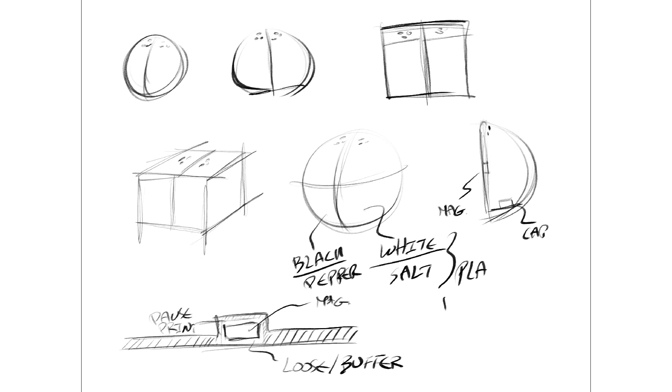All right, let's start CAD modeling now. The concept I decided to proceed with was the spherical concept from the sketching. So I'm going to start with that - a simple revolve, hand-sized.

I'm going to use my own hands for the anthropometrics in order to know what would be the average size human hand. With that, I'll get a ballpark of how big the spherical-shaped salt and pepper shaker should be. I'm going to use in SolidWorks the single part multi-body option - this is the way I'm going to model this part. Let's start.

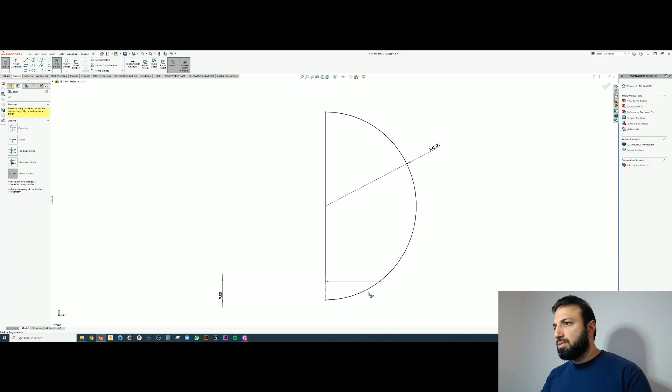Okay, so now we have a spherical revolved shape, which I think looks very nice, and it will end up having a good aesthetic feeling overall in the model, or in the product itself.

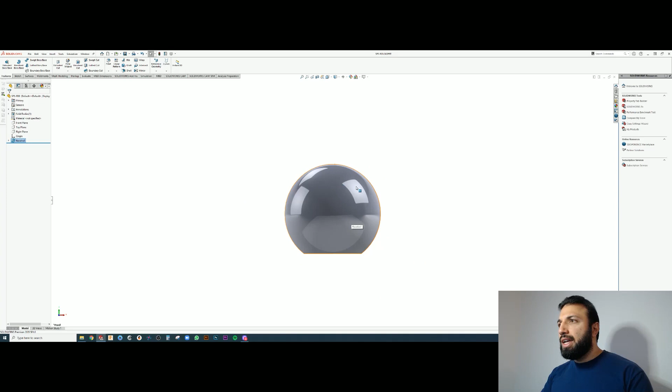The way I've done it: I checked my hand, it was roughly 78 millimeters, so I rounded this up to 80 millimeters, and I cut from the bottom 8 millimeters. Then I realized, okay, that would be minus roughly 10% of the overall height, so I just made it more - 90 millimeters, with a cut at the bottom or at the base to act as the stand for the entire salt and pepper shakers.

So with that, I would continue with the modeling of the individual components. I'm going to do a split line, splitting the sphere in half, signifying or modeling the salt and the pepper as separate objects. Let's do that.

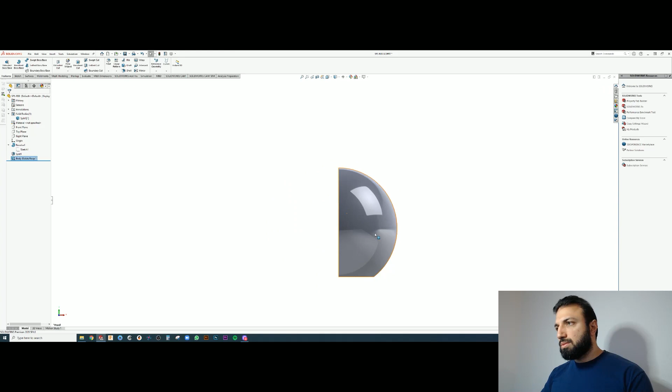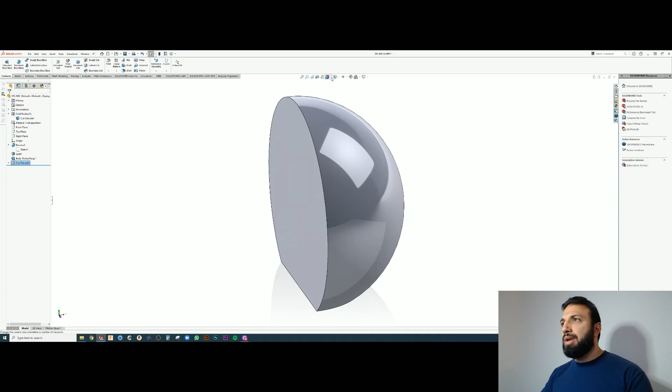Okay, so now I split the body into the two half-sphere pieces we needed. This made me think about where to place the magnet. Where would be the ideal place to place the magnet? Probably a part like this would be better off printed on the side, so that surface would be facing the bed.

In this case, I would place the magnet, or the entrapped magnet, on top of this layer. The two pieces, or the two shaker pieces, will be attracted to each other by the magnet, so they're going to have a nice snap when they get near each other - like they're sucked together very quickly.

I have my magnets here - these are 10 millimeter diameter, 3 millimeter thickness. These are the ones I'm going to use. They're pretty powerful, pretty strong, with a strong magnetic field. I think they're very decent for this application - they'll have a good, snug, tight fit, but they won't be too powerful for the forces of a simple application like taking them apart to put salt or pepper on your food.

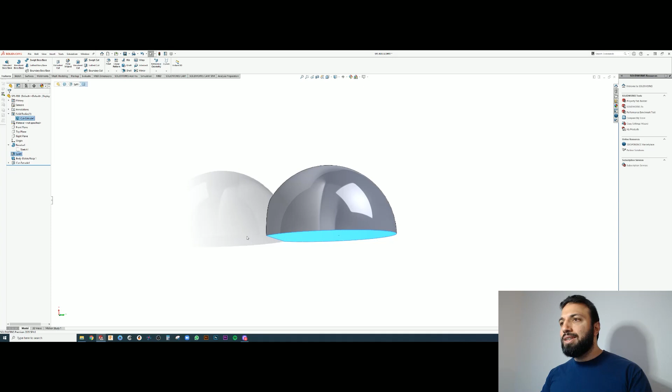So this is the surface I'm going to model the magnet onto. You might have noticed I've made some sort of a base here - I thought about this as well. I think it would be beneficial to have a cap here in order to refill your salt or pepper. The idea is that I needed the cap to be offset a bit from the ground, so the cap won't be unleveling the entire base. That's why I did that, and we'll follow the cap design in a second.

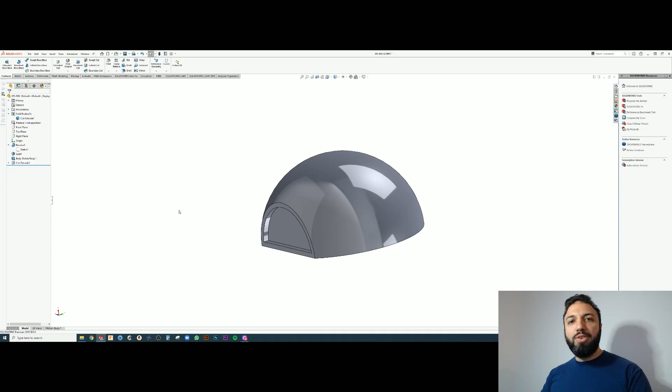But first, let's model the magnetic piece.

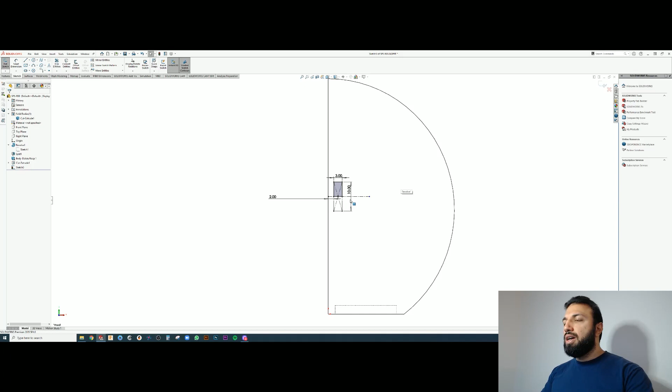Okay, so here this is an interesting and an important point that I need to mention. So right now the magnet, as we said, is 3 millimeter by 10 millimeter, and we're gonna apply a revolve roughly in the mid, or actually exactly in the middle of that line span. The question here, or a critical parameter to consider in this CAD model, would be the distance between the magnet and the wall.

At the beginning, I was thinking about having it roughly 2 millimeter, and I was like, maybe that would be too thick, because consider here you have 2 millimeters of plastic, and on the other side you have another 2 millimeters of plastic. So that would be 4 millimeters of plastic as an obstacle towards the magnet itself. So let's make this a little bit less. If we're printing with a standard quality, again, this is the direction of printing. So this is the start and this is the end, or this is the direction left to right.

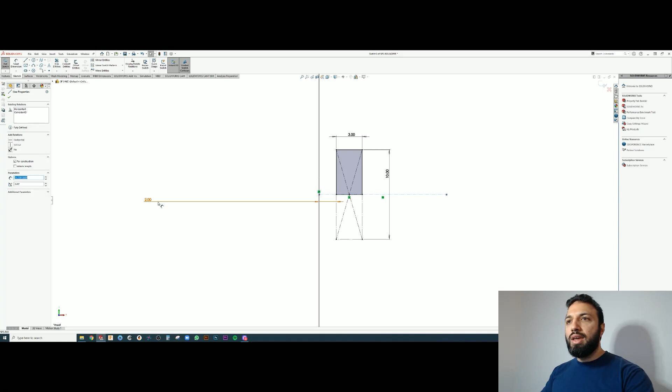If you're gonna follow the 0.2 millimeter height of print, 2 millimeter will give you, I would say, 10 layers. So let's go with less than 10 layers. So maybe 0.8 millimeters would be roughly 4 layers. If I would add some buffers as well, because we need to have some buffers along the actual magnet, which is exactly what I will cover in a second, I would make it maybe at 1.

And you will see in a second that when we build the plastic around it, it will be a little bit loose in the pocket that we're gonna create right now. But for now, this is where I'm gonna model the magnet, 1 millimeter from the wall. Let's continue.

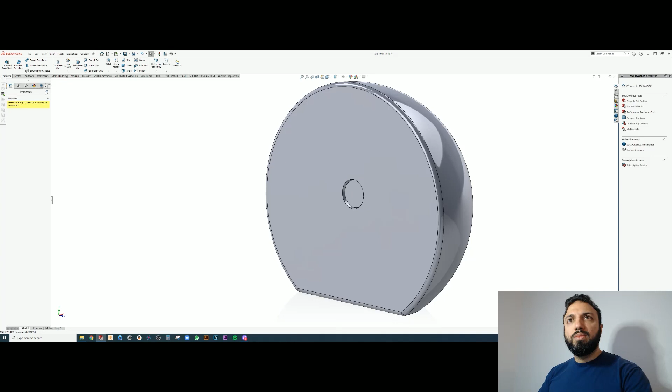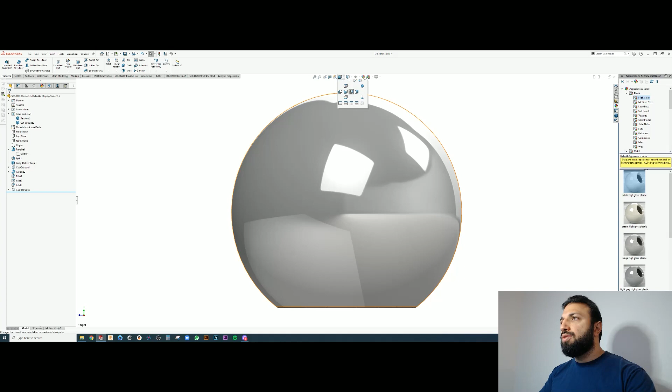Okay, let's talk a little bit about what we have done so far. So basically, I was thinking ahead about how to trap the magnet in the model. And the best way to do this in this particular model would be, after we created the solid of the sphere itself, or half the sphere, to create a shell feature.

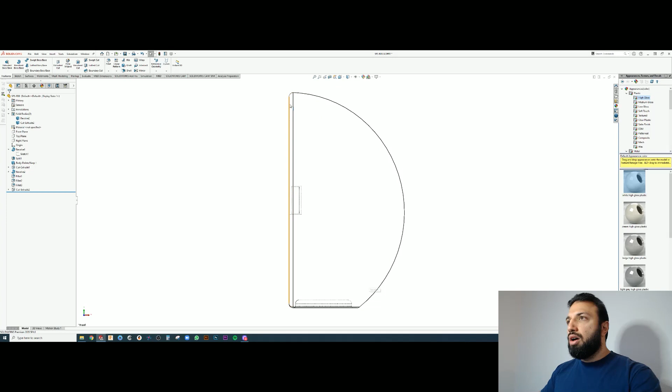This shell feature will basically create a contour of the same geometry in 3D, offset inside or outside if you wish, but in our case we're going to do it inside of the same solid model, hence creating the negative space inside where it will take the salt or the pepper. So I was thinking, now is the best time to create the pocket for the magnet. After this I'm going to do the shelling, so the shell will follow the contour here, and afterwards I'm going to close this one with an additional small extrude.

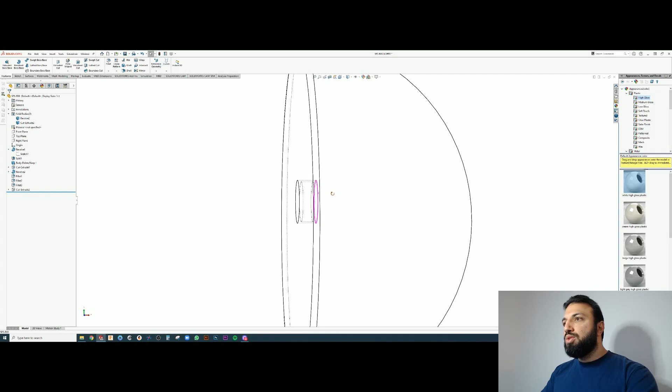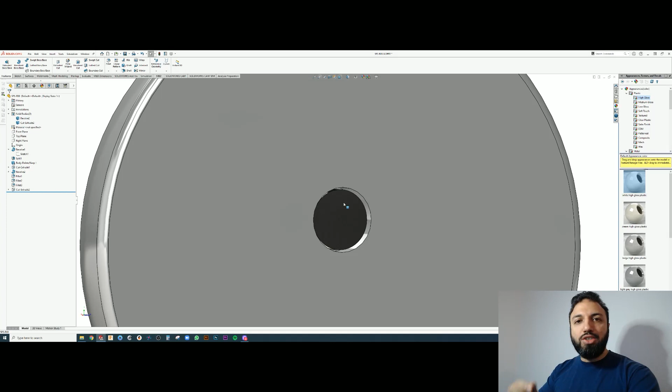So whilst doing that, you saw I modeled a cut. The cut here, as I mentioned earlier, is a trap magnet solution. This is not a tolerance fit or interference fit design where we're gonna squeeze in the magnet, because there is a difference. With this trap design, I will be printing, as we said, from the bed until the ceiling of the magnet. Then the print will pause, giving me the chance to insert it. Then after that, it will continue printing.

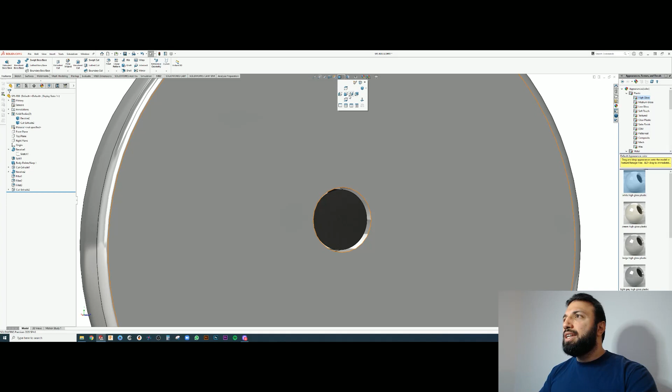In order to do that, I need to make sure that my nozzle is not hitting the surface of the magnet, or even worse, that the magnet is not latching itself to the body of the extruder, due to the magnetic forces. So what I've done here is I created very much of a clearance fit, a very easy to insert clearance. I think I used 0.3 at this stage, or even more. Let me remind myself very quickly.

And actually it's 0.4. So 0.4 in general is very good, because your nozzle diameter is actually 0.4. So basically, you're telling the extruder to move by a nozzle span outwards. And on the diameter, this will be 2 nozzle spans, which is very much from experience as well. So this is very good clearance. The second thing is where this cut will stop.

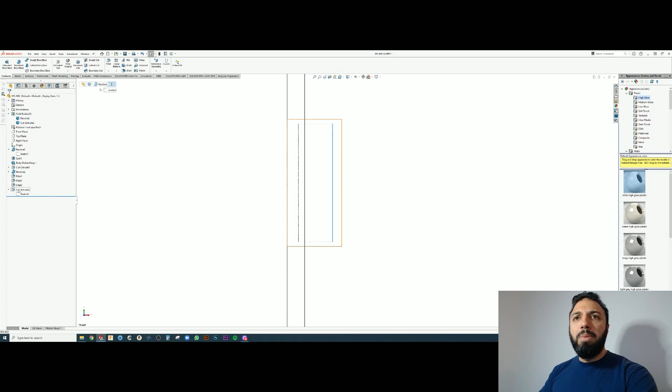I'm a big fan of making things related to each other. So if I later on wanted to change something in the model, I do not need to enter numbers and everything. So I made it an offset from that surface, i.e. the surface of the magnet, by I think 1 millimeter. Yeah, actually 0.8. So let's talk about that for a second.

0.2 millimeters is the layer height usually, right? 0.8 millimeters in a 0.2 layer height will give you 4 layers. If you're printing at 0.3, a 0.8 will give you actually less. In this case, it will give you 2 or 3 layers, depending on how the slicer will slice things eventually.

So in order to be on the safe side, again, I put 0.8. So it will be 4 layers in the case of a 0.2, and it will be 3 layers in the case of a 0.3 millimeter detail level. Again, as you remember, the arrow direction is the printing direction.

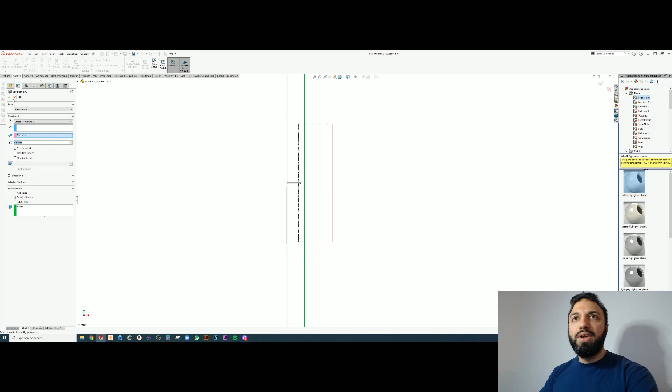Sorry, it's not very easy to explain. So if this is not very clear yet, let me know, and we could definitely do it. So now we did this, and now we're gonna continue.

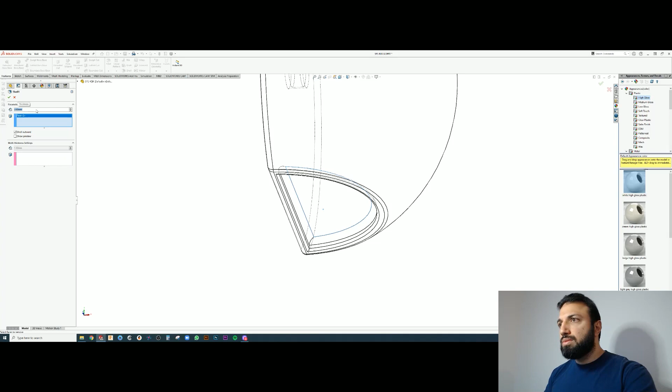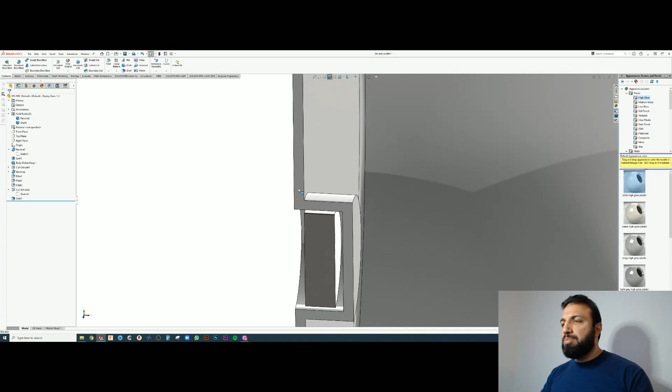Okay, so now we did the shelling. So let's again talk a little bit here for a second. I used a 1 millimeter thickness, and I'm gonna basically be printing only the contour. I do not need to print any infill because I want to maximize as well the space of the salt and pepper inside.

One of the things I noticed when I was doing this in SolidWorks is it didn't give me except a very limited, like very small thickness if I didn't compromise a surface. So I basically gave up that surface because it's the easiest to remodel, and I'm gonna do that right now. And whilst I'm doing so, I will add the cap hole where we're gonna be filling the salt and pepper from.

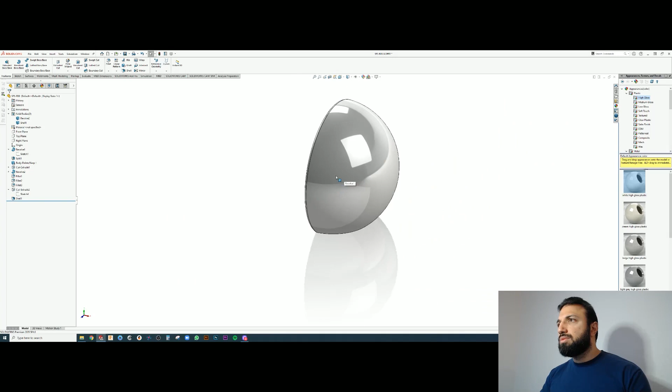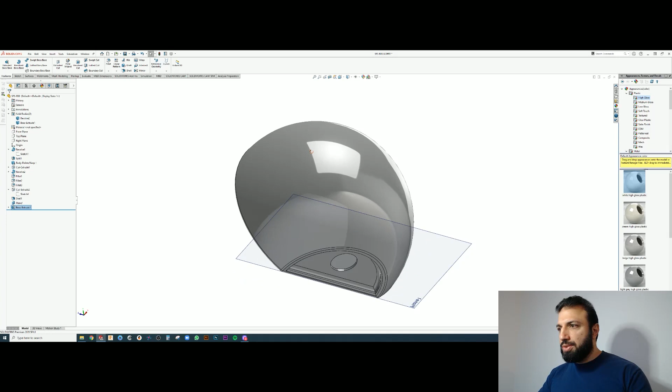All right, so now I think it's clear what we've done. So we replaced the face that we have removed. And with that, I added as well the hole for filling. So I made it a little bit larger, I think to 12.5 millimeter. 10 millimeters seemed a little bit too small.

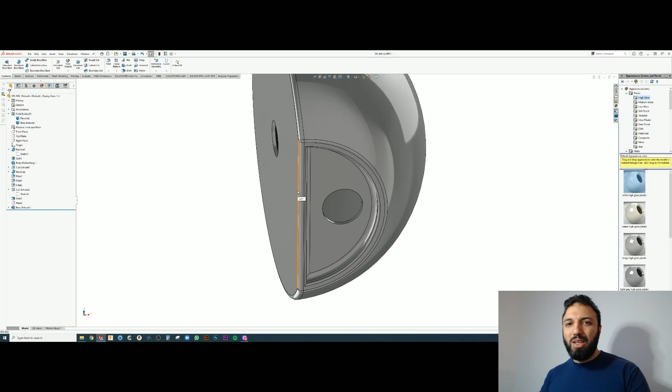And again, from a user-centric design, I think the larger that hole is, the better, because filling might get tricky, and you do not want to have a very small hole diameter here. So that was basically it here. So let's conclude the trapping of that magnet now.

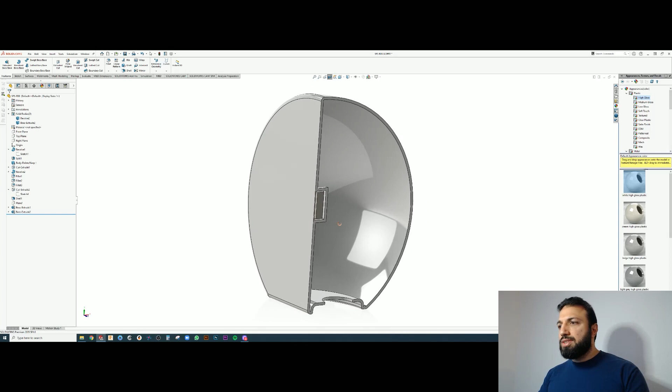Okay, so now our magnet is trapped inside. I think we have achieved what we wanted to achieve. A couple of points here, as you can see, the edge here, I made it again at 0.6 millimeter. Same concept applies. If you are having a 0.2 detail level, that will give you 3 layers. And if you have a 0.3 detail level, that will give you 2 layers. I think that is good enough to establish the base of the print.

And as well here afterwards, all of this is air, right? So all of this is loose. Your magnet will be pretty much loose in this case. We might be able to tighten it a little bit from this side. And when you insert it, it will be basically falling down. So this space will end up being much bigger than this space. Right? I could even hear that the magnet will be kind of shaking inside.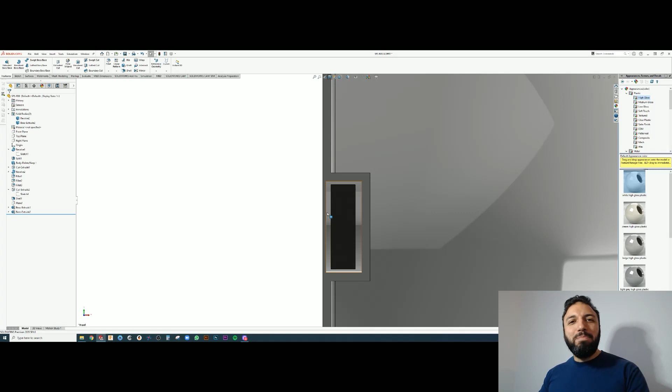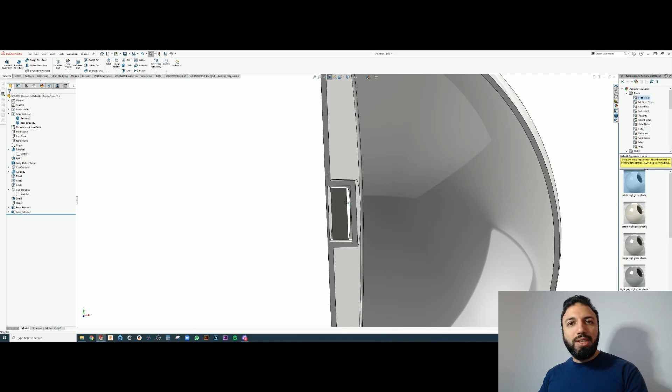I think that might be a nice thing to hear. But maybe we could make it a little bit smaller in the second iteration. Let's see. I do not want to be presumptuous and assume it was going to work perfectly. But from what it looks like, there is no reason to believe that it's not going to work. Maybe now we add some holes for the salt and pepper to flow from on the top surface. Let's do that.

Okay, so let's spend some time talking about why we're modeling this hole to be particularly large. You could see here the 2.5 millimeter diameter; your nozzle is probably 0.4, because that's the most common nozzle in the 3D printing industry, specifically the FDM desktop or home kits like Prusa, Anycubic, and all of these commercial home desktop 3D printers.

You're going to end up having a 0.4 nozzle; this is the stock nozzle, as they call it. If you go with a 1 millimeter, this is a little bit uncommon. If you go less, which is 0.2 and 0.3, and maybe there is a 0.1 as well, I think it's called the mosquito nozzle. So all of these nozzles are there.

I'm aware of this, but when I'm designing, I'm aware of what the nozzle diameter is. The one I have on my printer is a 0.4 as well. I'm not planning to change it for this particular print. So imagine, if you put a 2.5, this is what you're going to end up with. This orange or now blue circle is what you're going to see because of the nozzle diameter, right?

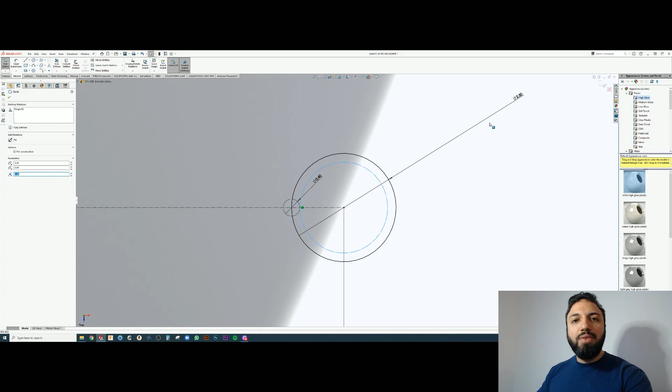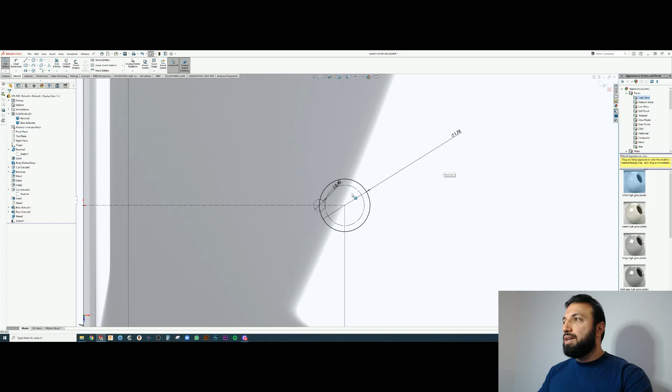Give yourself some buffer. So I think 2.5 might be too much because, again, we do not want the salt to be flowing very easily. So maybe a 1.5, yeah, maybe that gives me the impression it's too small as well. So I was gonna go with the 1.75. And again, design is all about iterations, and this is our first iteration, and maybe we decide to make it bigger in the next print. So let's proceed with that.

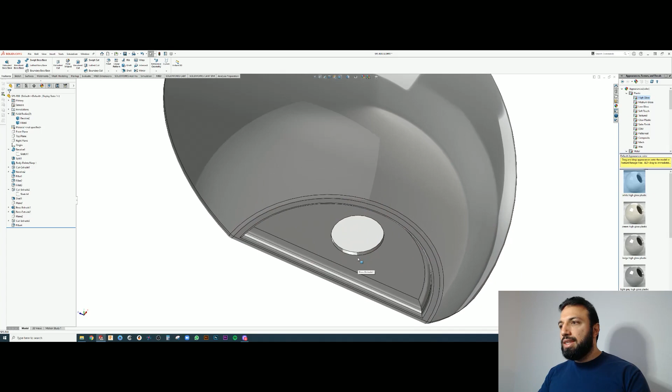Okay, so now we finished the modeling of the holes of the salt or pepper shaker. I think I'm gonna keep them both to 3 holes just for being symmetric. I like this idea. What I'm gonna do now is model the cap, right? So the cap will be added to the bottom as you probably see here, and with this I will go ahead and design it. Let's do that.

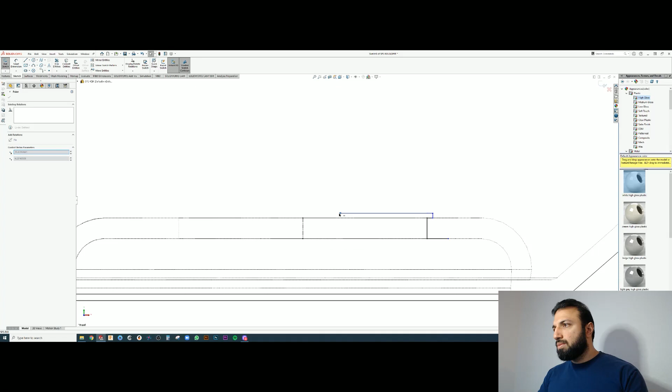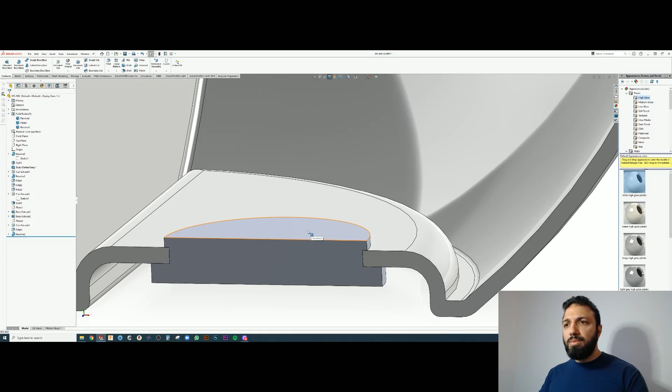Okay, so now I think we've modeled the cap for the salt or pepper shaker. As you noticed during modeling, there are quite a few parameters I used here. So first of all, I created a shoulder so when you insert the cap, it is going to latch a little bit here. As you can see, everything is basically aligned, which is very uncommon, and you're not going to see me do this a lot. But this is because I need this to be a very tight fit. So this is the reason.

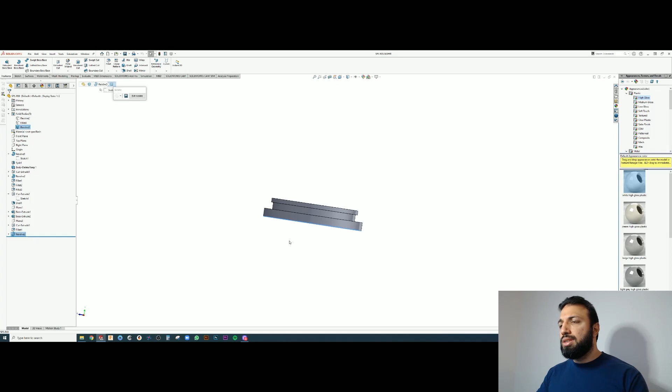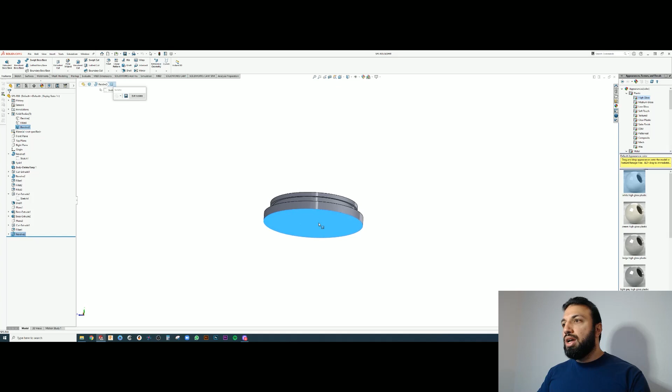So this means I might not be able to create a very deep place to place the fingers, right? Usually in these types of caps, you have a space where the fingers go, and then you pull it out. As a substitution, I might need to do a notch from the sides to enable the user to grab it. Otherwise, that would be a bad design. So I'm gonna do these side notches to enable pulling it out easier.

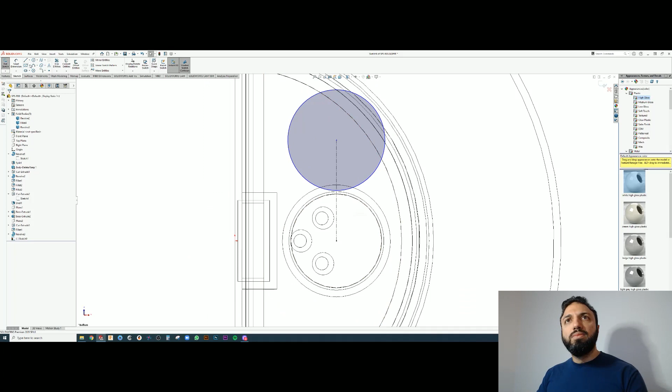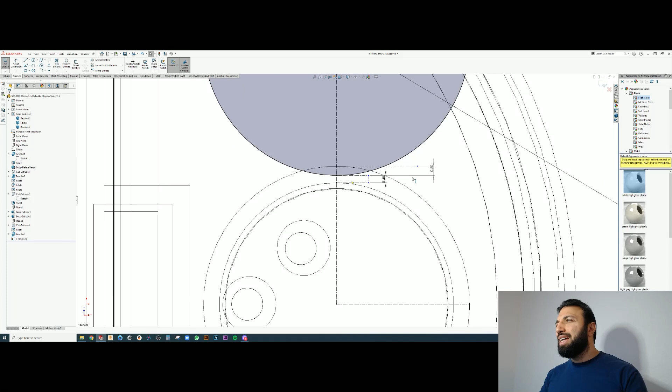Okay, so another point here: we're trying to create the side notches, but the shoulder is not big enough, right? If I used two cutouts of 15 millimeter circles, I will end up with only half a millimeter on each side for that notch. I think that's not big enough for a human to grip. So I'm gonna increase the shoulder of the cap base a little bit to get at least 2 millimeters here. Okay. So with this, I think we reached exactly the point we wanted, which is 2 millimeters. I think this is cool. And let's proceed.

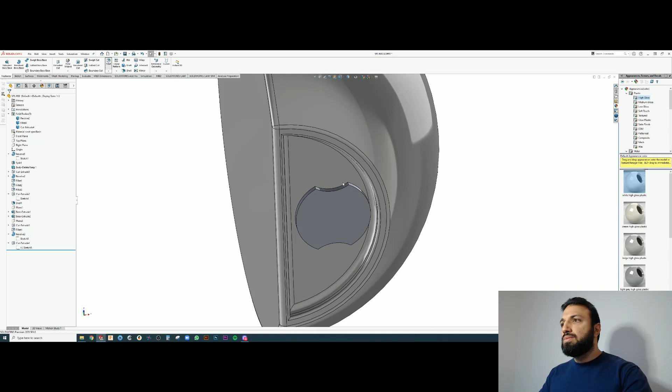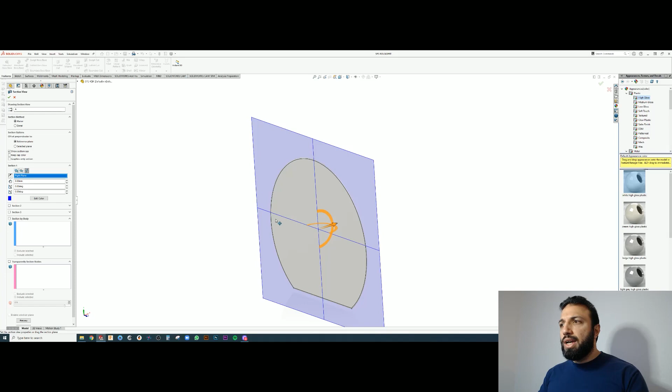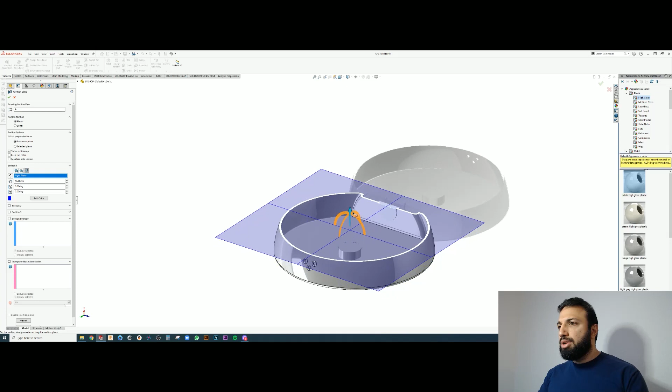Let's do a quick pre-flight check by sectioning everything and checking it through as if it's a normal print. Usually what I do is place it like this, as if this is the printing, and I go through it step by step. It looks very cool actually too. Of course, I'm not gonna print the cap in this position, but it gives you an idea of how things are gonna be printing, until we go all the way up. Okay. So that direction looks good to me.

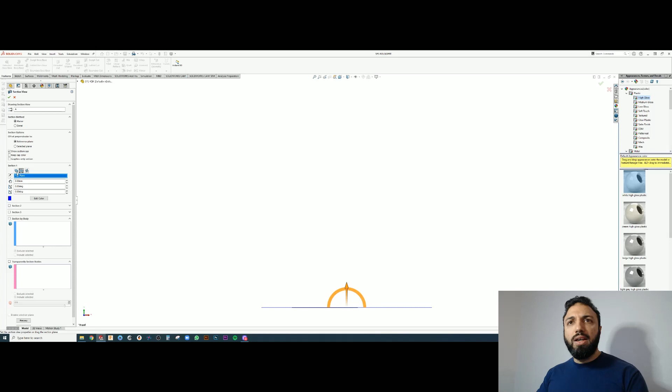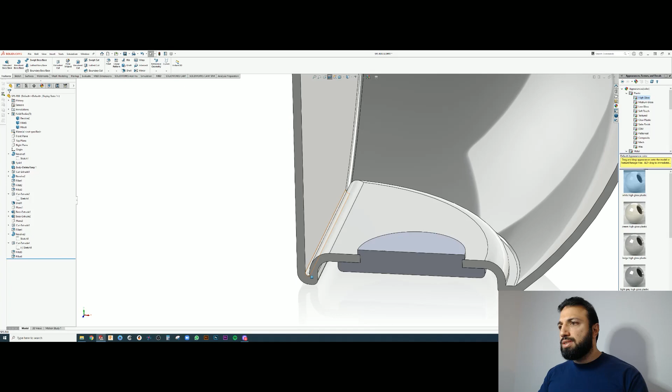The second direction, which is the magnet direction, I think this looks fine. I think I will fillet these edges a little bit. I do not want these sharp corners where the salt or pepper is gonna be trapped or accumulating after some time, right? So you want to make it a little bit more curved. I think this looks nice. This looks okay now. I think this will prevent any sticking. This might be another concern here around these edges where again salt or pepper might accumulate over time. So maybe we need to fix that as well.

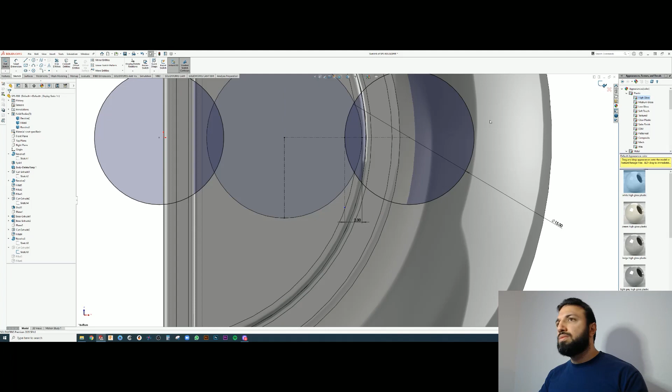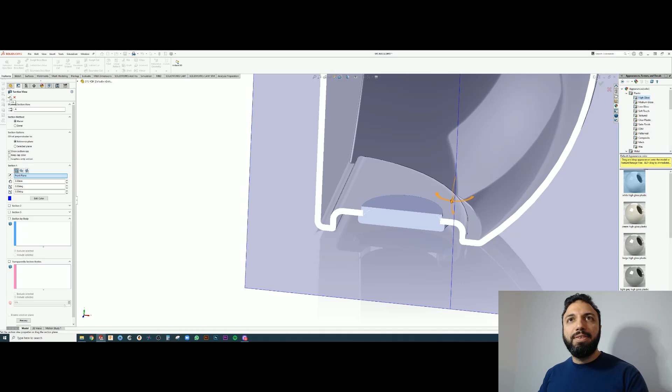Okay, I think now it's clear. We've solved this dilemma. I think this is better than before. Yeah, by doing so, of course, as always in CAD modeling, you create some ripple effect in some area. So I just had to readjust or reorient the cap. I think that's cool as it is right now. Again, this is iteration one. Maybe we need to do another iteration or so. But let's do that, and now we're going to mirror the objects.

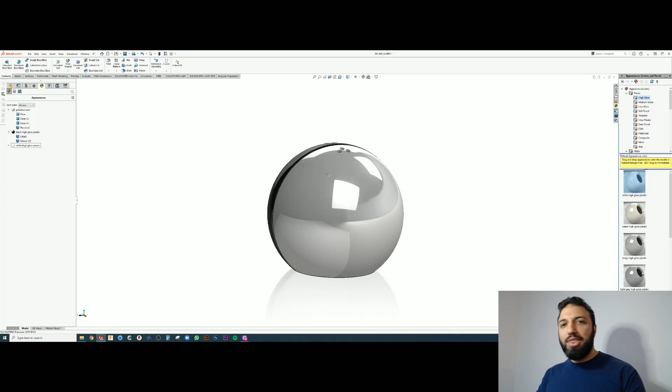Okay, so this is now our object. I think it looks very cool. I like the contour. I like the spherical shape. I think it's very nice. Actually, I have a disclaimer. This is actually a reinvention in the 3D printed form of an existing product I had before. But I like the spherical shape. I think it looks cool aesthetically. It's very pleasing to look at. And now we're about to take it to 3D printing, so let's start slicing.

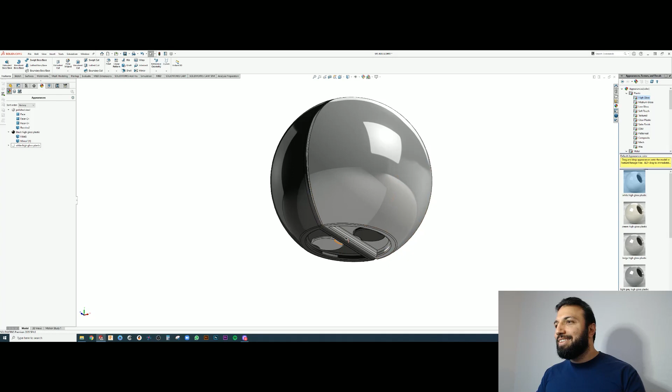As you can see here, I did some cool trick on the bottom, where I made the black cap on the white shaker, and the white cap on the black shaker. The idea here is basically to make it a little bit more visible, and it acts as a signifier or an indicator that this is where the cap is, and where you could pull it out and so on. So what I'm gonna do now, I'm gonna hide the unnecessary objects.

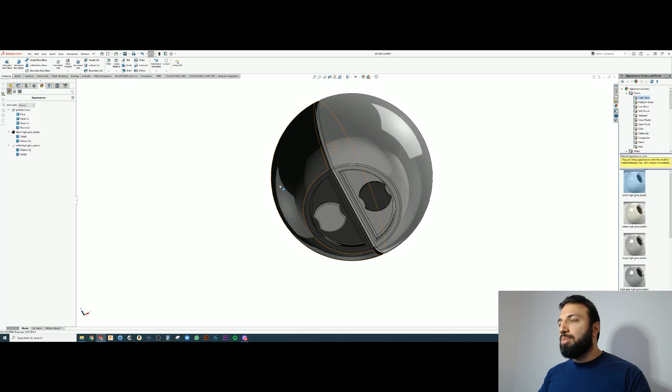The cool thing about this print as well, it's identical, it's symmetrical, so you just need to change the filament but use the same G-code that you export once. You do it twice, once in black and once in white, and after that you swap the caps. So let's do that right now.

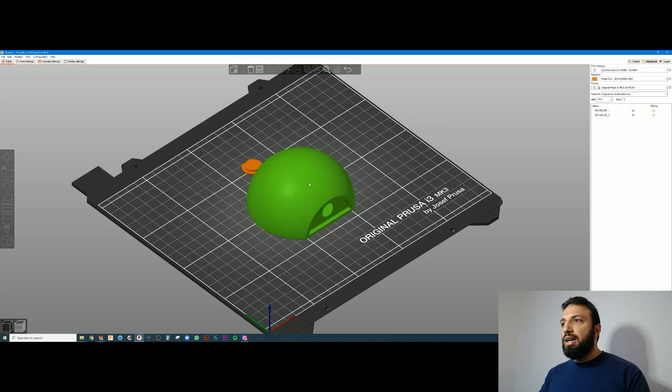Okay, so now I exported it to PrusaSlicer. As you can see, this is how it's going to be printed on the 3D printing bed. What we're going to do right now is slice it. Again, for the first iteration, I would go with a draft of 0.3 millimeter, and afterwards I'm going to do a more detailed print after we verify that everything works perfectly with the first print. So I'm going to do a 0.3, and sorry, thank you for the suggestion, but I do not need that help right now.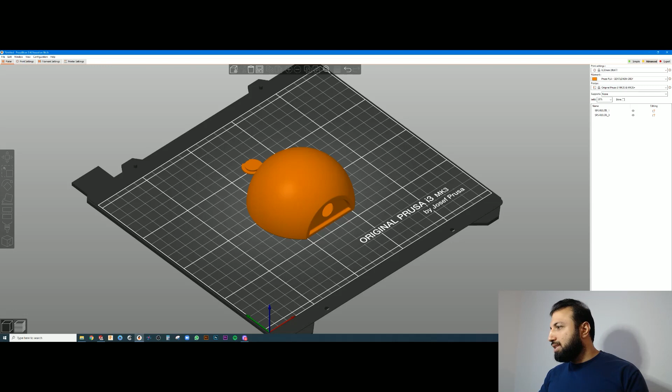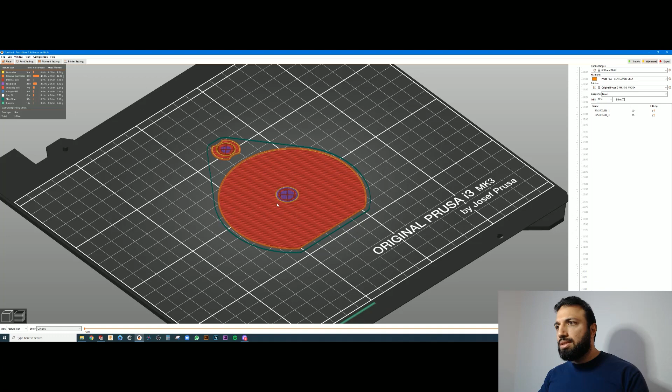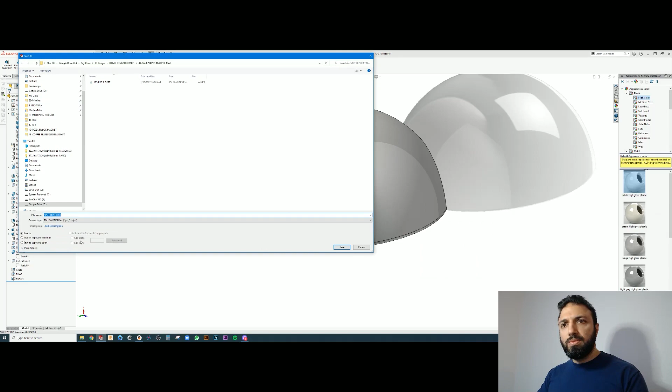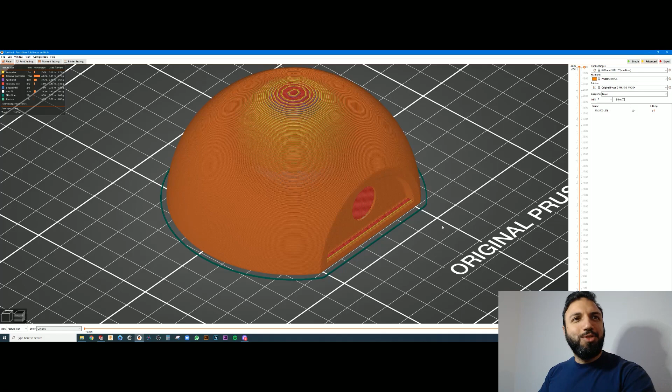So let's see how it sliced with these parameters. I think it looks pretty nice. But something here is not fully right. This should be a space, but for some reason it's considering it a solid object. Let's see. Okay, so finally we did it. I think there was something messed up in the settings. So I just adjusted that, and now it looks cool.

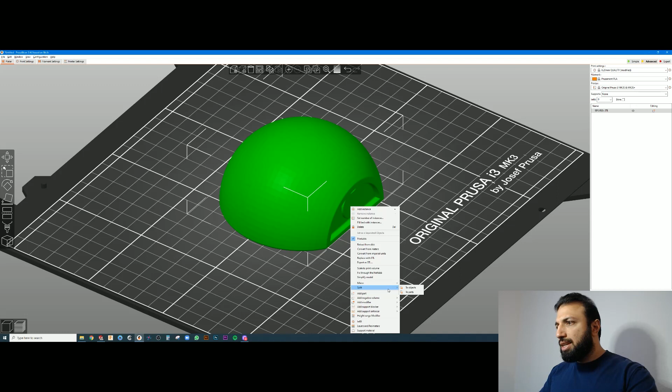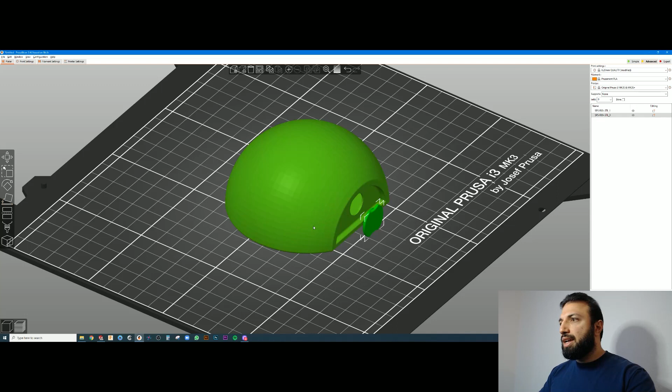So now I'm gonna re-import it again to give you the commentary. Basically, I put it on the bed and I split the objects, and with this you can select every object on its own. For some reason it's still exporting the magnet, so I'm gonna just delete it, and this is okay. And this one as well is okay, and again we're gonna do the 0.3 draft as I said.

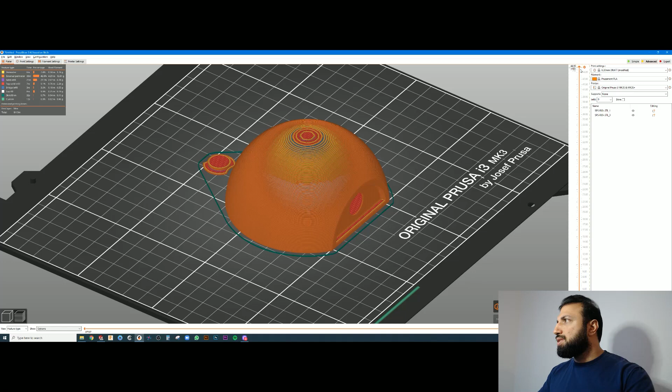We're going to do a 0% infill. 0% infill means I do not need any infill, which in some printers is called vase mode, but for the sake of this one, I think it's cool. So this is how it's going to print. You need to select here, just before it actually starts to close that fillet and close on the magnet. See this layer, between layer 14 and layer 15, I'm gonna insert a pause here.

Okay, so this pause means that I will be pausing the printer at this stage to insert the magnet, enabling the magnet insertion. So just be careful. I think this could be more important in the second print than the first print, how to direct your magnet, to make sure that the right polarity of the magnet is placed, north and south.

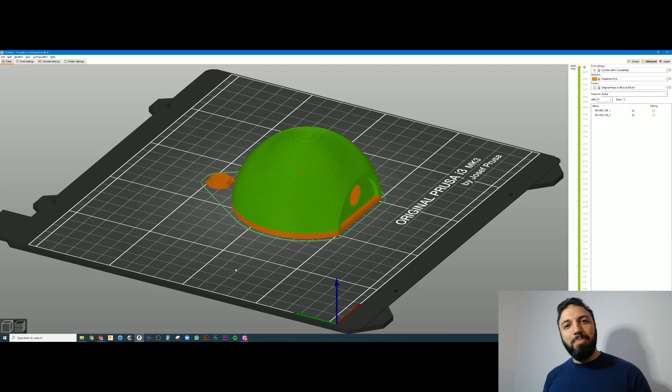So just make sure it's north facing south, or the other way around, but do not, of course, put north and north, or south and south, so that you do not get a repelling effect, which is not desired, and it will be too late after you print. You will not be able to take it out because it's an entrapped magnet. With this, let's go ahead and print it and test it, and come back together and see what we have created. See you later.